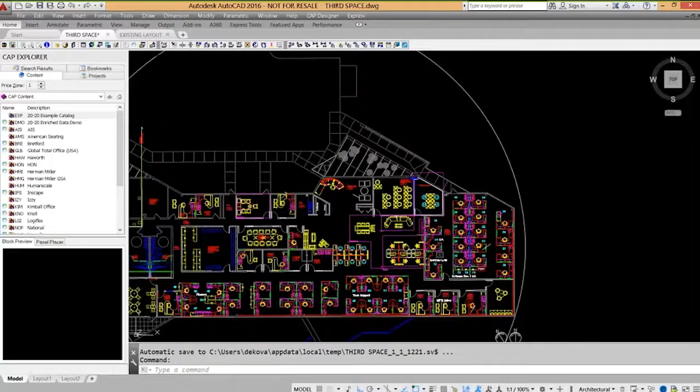So I'm going to open up - this one happens to be a CAP drawing. And there's actually a lot of different things going on in today's plan. A lot of very traditional spaces with a lot of panels. But if I come up and I look in this area here, we've got some general meeting spaces, or a little bit lower key areas that aren't necessarily defined to one department or one specific area, but maybe a little more transitional.

So I'm going to focus on this low seating area for a moment. I'll open it up in Visual Impression. This one already has a scene boundary built around it, meaning I'll be able to visualize just that one section instead of the whole entire plan. I'll give this a moment to open.

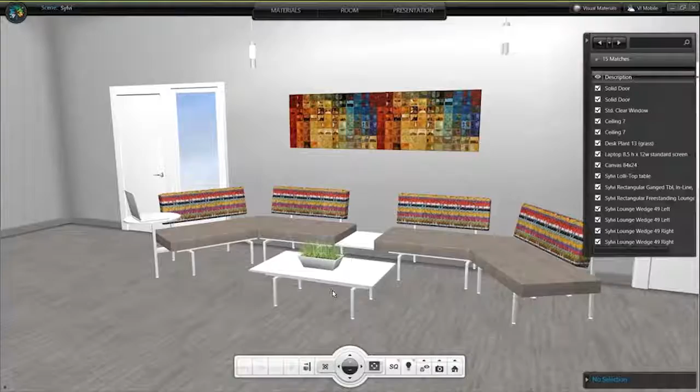I already have a few things specified, so you'll see some finishes, but I'll back up and tell you how those got there. Sometimes when rendering or working with a product line in Visual Impression, it's very quick and easy to specify and pick finishes. You essentially pick the product, go under materials, and shop for different finishes. For instance, this was showing in light green, and I can change it to dark green.

Some of your products will automatically apply or show the finish you want. But notice when I pick, for example, this freestanding lounge table, I can see my options in a list. I've got a laminate selection, I'll pick one of these styles, and I've got a few different colors. When I pick it, this catalog isn't enriched yet, so that means I have to go look for a few of the finishes, but I'll show you a couple tricks.

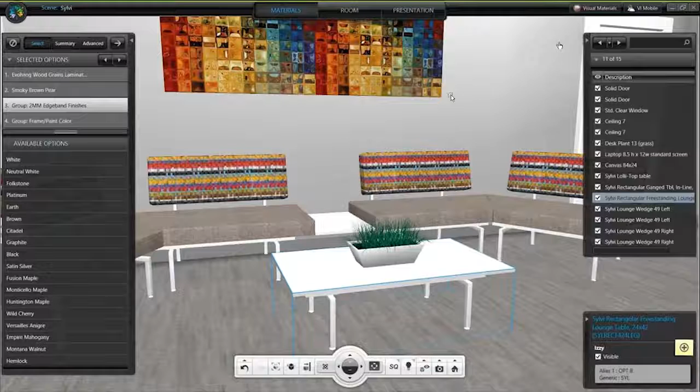Notice a moment ago I picked one of the wood grain laminates called Smoky Brown Pear, and this happens to be a Formica color. So I'm going to jump up to Visual Materials in the upper right-hand corner, and look—let me maximize this—there's a whole section in Visual Materials called Suppliers.

When you install your catalogs, you check one more box to say if you'd like to also install these supplier catalogs. If I step under the Formica catalog, I have a handful of finishes already here. Depending on how they've been loaded and organized, sometimes I can open that up further and look at different collections, or I'll cheat and search. I'll type in the word 'smoke' and notice I've got a smoky quarterstone, a smoky brown pear—the one we want—and smoky walnut.

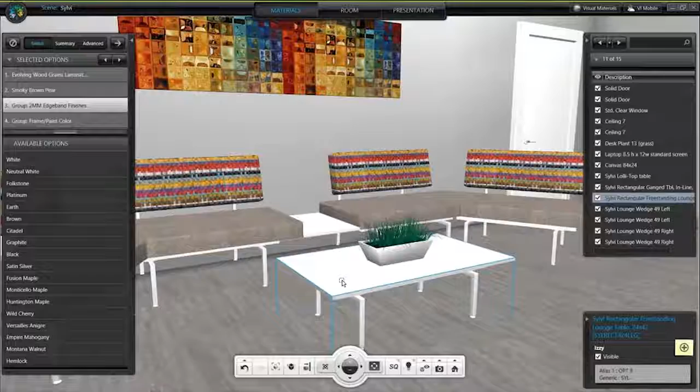Let's say I want to use that smoky brown pear right away. I can take that finish—and I'll cheat a little bit, moving this over so you can see it. Let's look at that table again, go to Advanced, and I can see the layer is this bright yellowish orange layer on that product. I'll simply take the finish I found from my supplier and drag and drop it onto that layer, so now I can see it on that furniture piece.

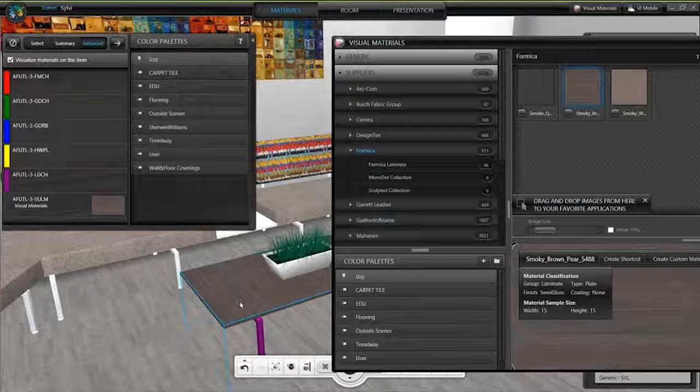So I didn't have to do too much homework—I just had to know what finish the client wanted and where I'd like to apply it. You might notice when it came in, it picked a default direction. Since this was a supplier material, we didn't necessarily know if it was going to be horizontal or vertical.

If for some reason I wanted to change that up, I can come in and create my own custom material off of this, creating a quick shortcut to it. So I'll do that real quick—I clicked on Create a Custom Material. The only thing I'm going to do different here is in the bottom right-hand corner, change the rotation a bit, let's go 90 degrees, and save myself a quick image.

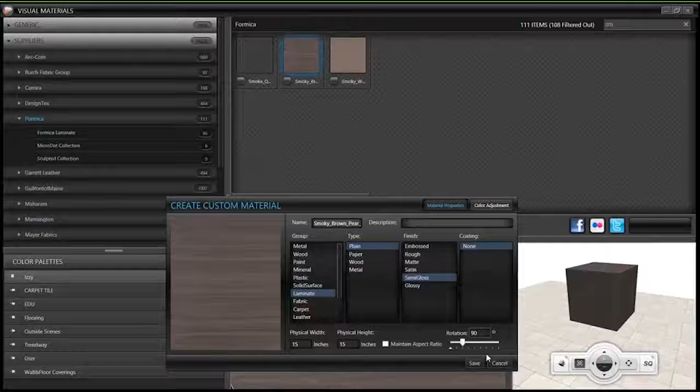Now, I happen to have a palette here already called Izzy, but to create one, you just click the little 'new' button, and I'll call this Webinar for today, and create a palette. The cool thing about saving these is they're really easy to access right when I'm inside Visual Impression. I can now drag in that smoky brown pear finish, and in my case I just changed the orientation to follow the grain of the table.

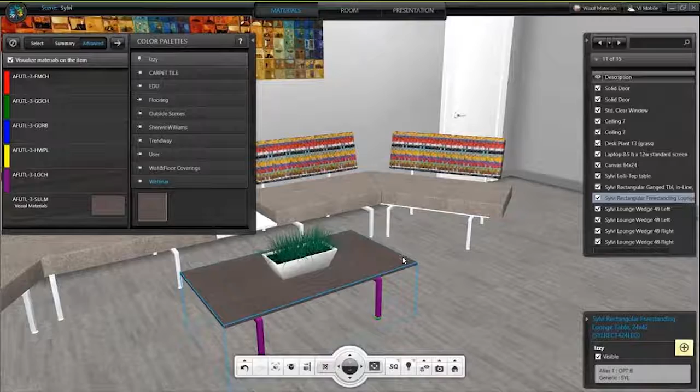All right, so that first scenario was a pretty standard finish we use all the time. But imagine sometimes you're looking through finishes too—like if I look at some of the seating, there's a really fun fabric on the back here. This one happens to be a fabric from Momentum. There are a few examples in Visual Materials under the Momentum supplier catalog, but you can imagine how hard it is to have every single finish loaded in here.

So if you go in there and you don't see the one you're looking for, you can also load your own. I jumped out to the web real quick. I'm out on Momentum Textiles website, searching for a particular finish, this one called Interium.

Many of these manufacturers and suppliers offer really great images, some in high quality. You can see all the different colorways this is available in. Maybe I want to try it in a more neutral color, this one called Draft. As long as I have access to an image, which this website does give me, I can download that really quick and see it.

So let's open that image up and see what that looks like. Here's a nice zoomed in view. Don't worry, this fabric really does have a bit of a pixelated look to it. I'm just going to copy or save this so I can reuse it. Let's save this to my desktop - it's called Interium Draft. Perfect.

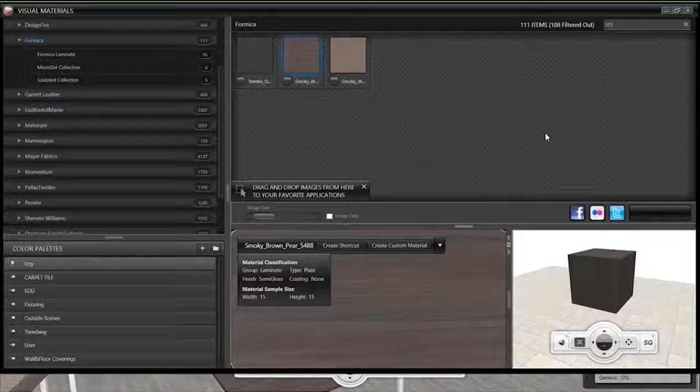Now, when I'm back in Visual Materials, I had previously created a color palette called Webinar. I can hit the plus mark next to that, and this will take me step by step into loading my own image for my own use.

Here's the Interium Draft color, I can open that up. Now when I add this, I'm going to just, for time, type something in real quick and specify a few details about it, like maybe this fabric, and I'll pick a few details about it.

Now notice it says width and height, and I still have my details like rotation. When I go back and look at that on the website, it mentions the repeat, and tells me there's a full repeat shown, about 26 or so inches.

So I'm going to actually try that out. This is something that sometimes you have to test, trial and error, to see if you get the right scale. But ideally the image we have - what was the size of that? Let me save that away.

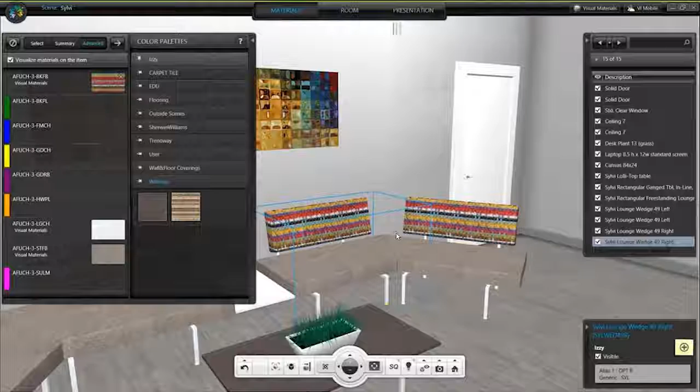Now I'll be able to take that finish and easily apply it to any layer on any of my products. I can see the layer is at the top of the list here, and let's try that in a little bit of a more neutral color. There it is. Pretty quick and easy - nice that I can bring in virtually anything.

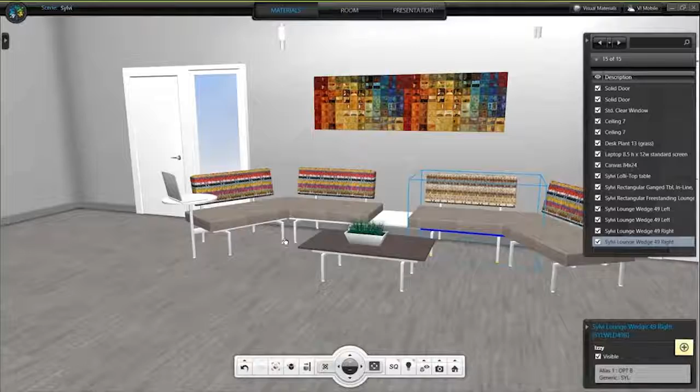I'm showing this on furniture today, but it literally can be anything. It could be flooring - this happens to be a carpet tile that I brought in. It could be wall finishes if I want to do something other than paint. It could be artwork. You're pretty much unlimited as far as this goes.

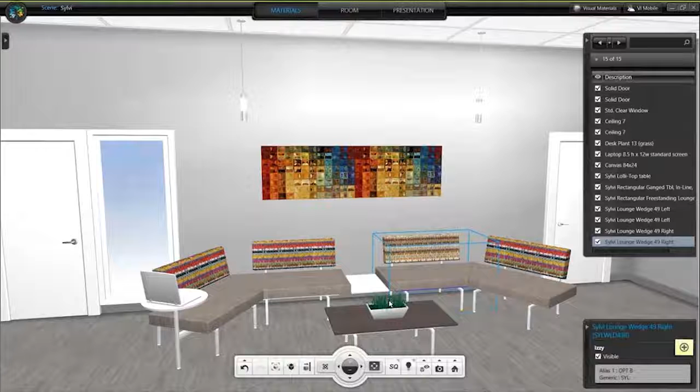So just to reiterate some of the things - talking about that third space in so many instances, and you'll see this a little bit later as the design continues, we're going to pop a lot of color and do a lot of things to really make these areas impressive. Let's take a look at the next segment.

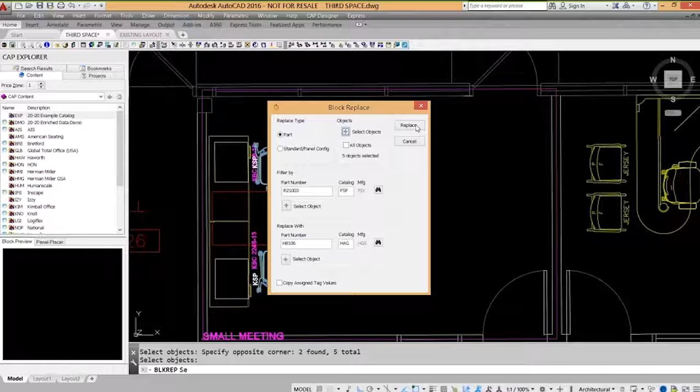Okay, just a really quick, easy way to move from one graphic to the next. Now we can do the same thing in Giza as well.

So for my Giza users, give me a second to zoom into that space. I have this very similar layout. One second as it's auto-saving right when I go to open it. Let me zoom in nice and close to that space. So same scenario - I've got the older chair and we want to switch it to a newer chair.

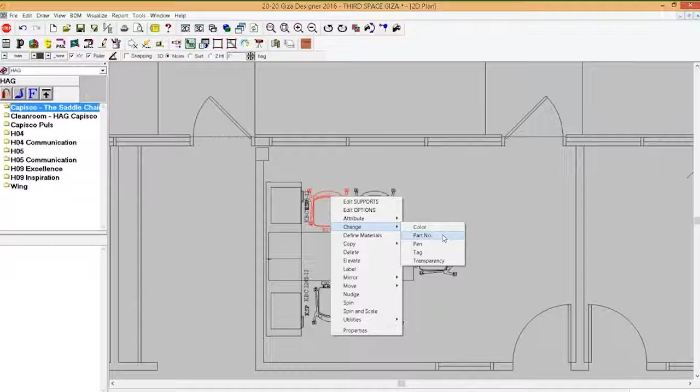There's a thousand different examples for this. Maybe you've got a traditional desk and you want to switch it to one that can be height adjustable, or you just have some different products you want to change really quickly. In Giza, you pick the item, right-click, change, and you'll notice there's change part number in the menu. When I choose change part number, I just open up this window and I can search for the product number.

Again, I'm going to switch it to that same chair. So I type in the product number and you get a little preview of it, and I can come in and choose change. Now notice that method - I happen to have just selected one chair, so it only did it to the one. I could go around and select multiple, just holding my control key down.

Or if you know you have a lot that you want to switch in an entire drawing, I can also go up to edit. I can use select, and select them by part number first, which I could quickly look through this list to find the part number that I don't want and switch it to the part number that I do want.

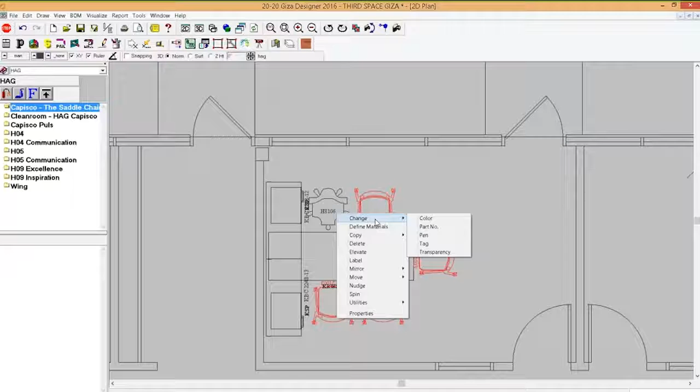So whichever method is easiest. In this case, I may only want to do it to the ones in this room, so I'll pre-select those, choose change, look for part number, and look for my product. This one was the HB106. There it is - when I changed it, now it changed all of them.

So from this point forward, if I were to send this to a worksheet, it counts the new product. If I were to look at it in visual impression, we'd see it in the new style of chair.

All right, so next couple topics. Let's take a look. All right, so now we're talking about collaboration and connection - connecting people with their devices and also with each other.

You can do this by, instead of having a printer at each person's desk along with waste and recycling, putting a few of those in separate areas scattered throughout the office. This encourages movement, which goes with health and wellness, and it can also spark new ideas through collaboration from different departments.

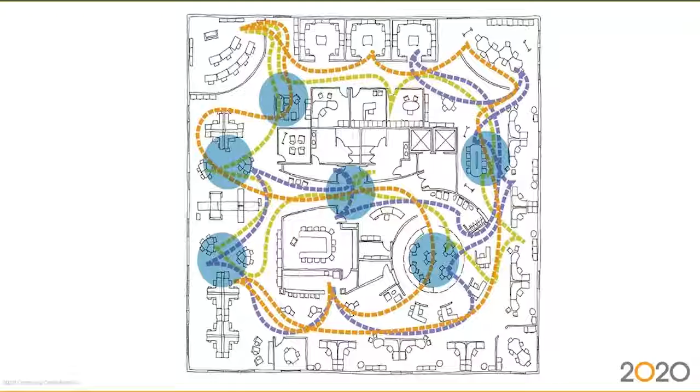This is a very different concept. Traditionally in so many of our floor plans, we've got designated areas for specific teams. What happens if you start separating them and pulling them apart, promoting more movement in that office?

Let's say we have a presentation to put together. I'm going to go back to visual impression and focus on areas where there's going to be a lot of movement, forcing a bit more collaboration—since we're often culprits of sending a Skype message before getting up to go talk to someone.

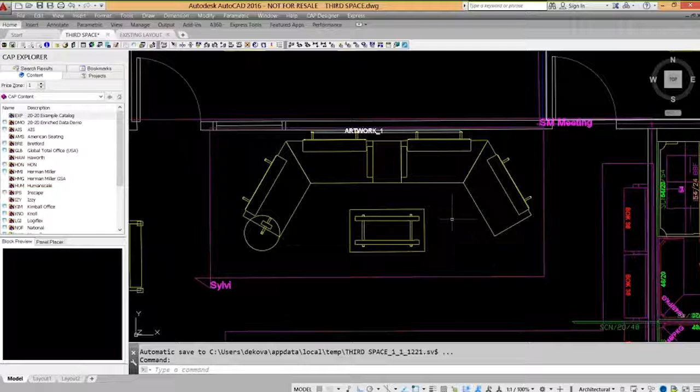Earlier in the project, when I showed the first rendering, I really only focused on one area, a small low seating space right outside a training room in this building. But there are other departments or things adjacent that I might want to show, so you'll notice a larger rendering window for this next area, where I'll show three departments or three different things going on in the space.

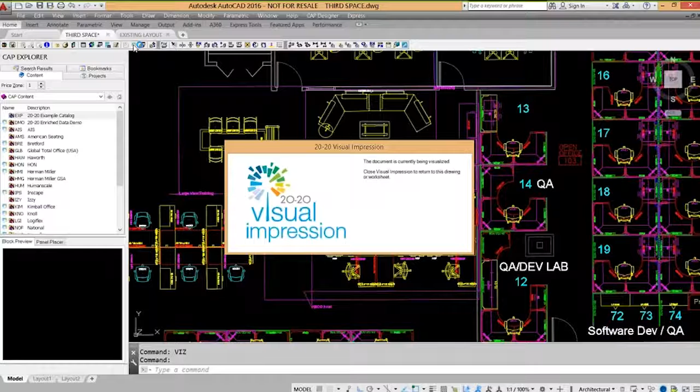So let's go back to visual impression. This time, instead of just looking at one focused area, this scene is going to show two or three different areas. Some are still in that third space category—a nice quick landing space for multiple people, something casual, right outside a traditional training room or entrance to the building.

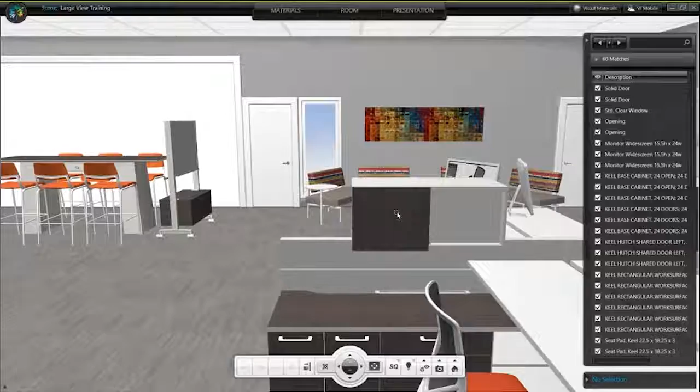Who else could work within that space? Let's take a look. As this opens up, you'll see not only our low seating area in the back, but adjacent to that is a high top table. It's got electricity and an area where we could do some informal presentations, technically open from a larger open space entranceway.

Just next door is a department, so a team is working here. How can they leverage or work through these spaces, and how can I show that off in my presentation?

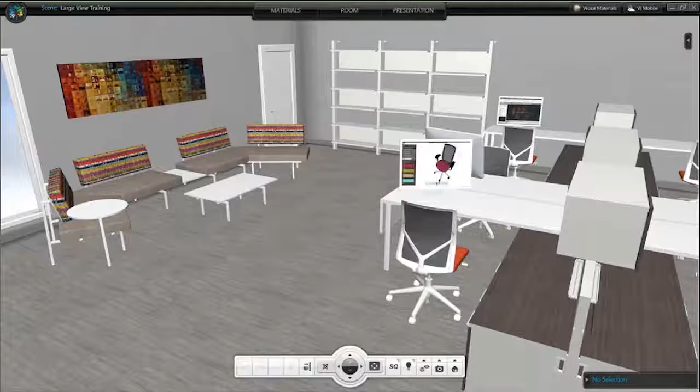Let's take a few different snapshots, looking at this a couple different ways. If I want to focus and really sell the idea of this high top table, I'll get a view I like and do this in high quality. As you can see, I've already picked a handful of the finishes—not every single one, but enough to show the overall concept in the space.

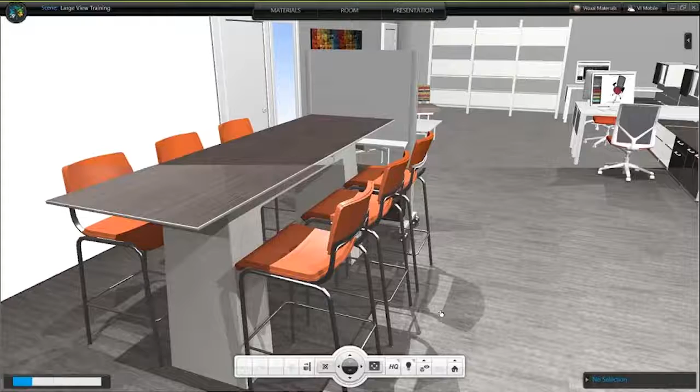Once this renders in high quality, I'll take a snapshot with the camera in the bottom right-hand corner. There are actually three different variations I might do. This one's high quality—pretty quick, intended to be very fast for presentation purposes. It's definitely not an absolute photo, but you get a good impression with the shadows and clarity of some of these finishes.

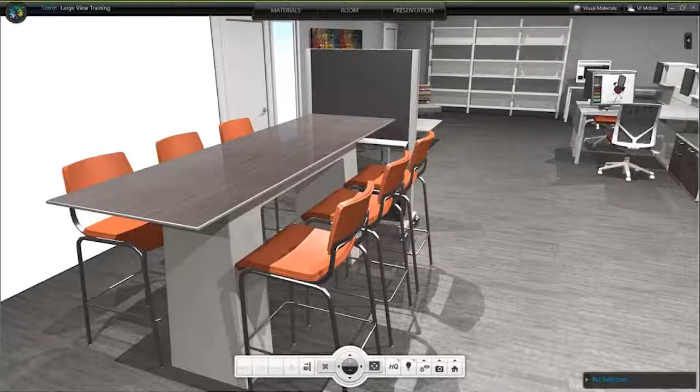Let's take a snapshot of that. I clicked the camera in the corner, and you can see it snapped that image. I could also go to High Quality Plus—for time, I'll skip that one today since it takes a bit longer, but it really softens those shadows and cleans things up.

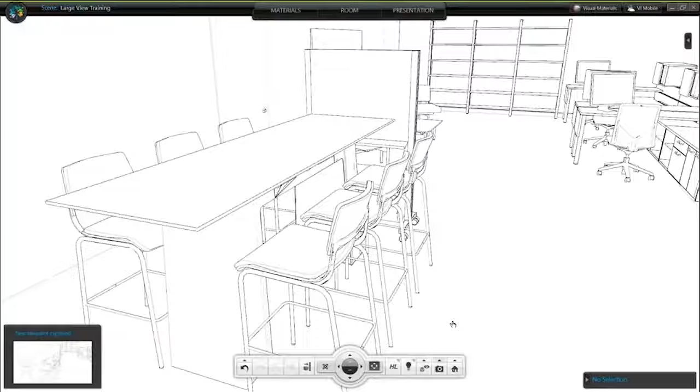But there's also Hidden Line. In some presentations, I like to start with this to take color out of the equation for a moment, or when there are a number of variations I'm going to show off within the space. So I took another image in Hidden.

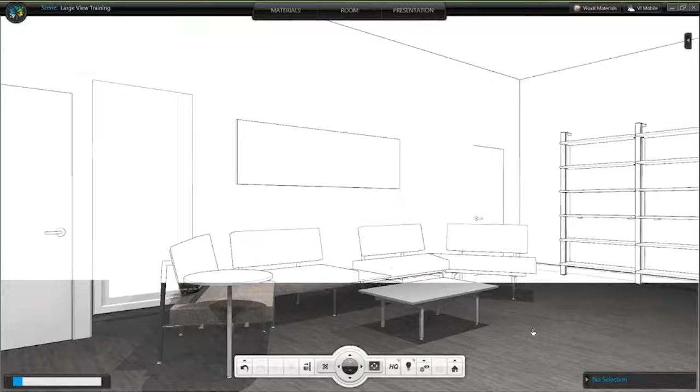Let me zoom back over to this low seating area and change the perspective just a bit. We'll zoom in, take a quick snapshot, and then change that over to high quality as well, since we'll probably want to show it in color. We'll give it a moment to finish up.

Now, there's also some lighting settings, some different things I could do to adjust this even further if needed, right in the dashboard. So we'll take a snapshot of that. And then let me just switch it back to standard quality for a second so I can move to this space. So the idea here is I want to be able to show this off, but I might do this by demonstrating it through multiple images to start.

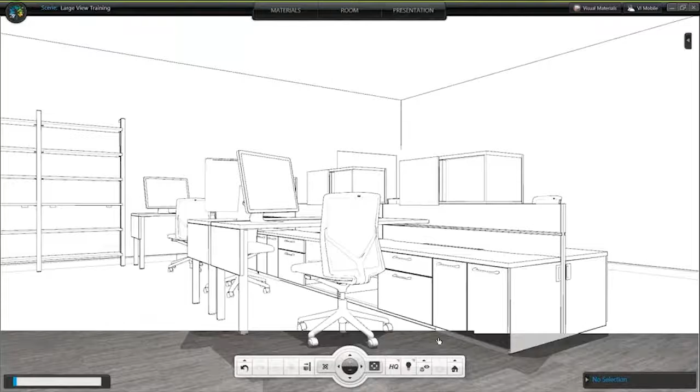And then I'll push that scenario even further in a second. Let me get a high quality image. Once this one's done, this will be the last high quality image that I will snapshot.

And then we'll talk about, well, what would you do with those snapshots? Am I putting together a real formal presentation, maybe in a PowerPoint? Am I going to email them to someone? Am I going to print them out? There's a lot of different scenarios here.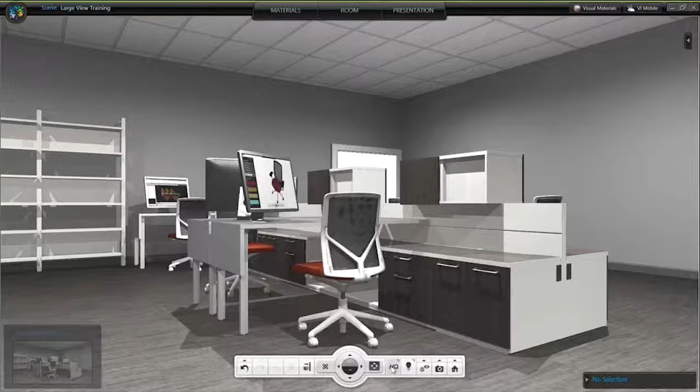So either from this screen, right where the camera is, I can look at my little film strip of all the images that I've taken. Plus there's a few from when I started the project before I finished all of my colors. Or I could go in and jump over to presentation.

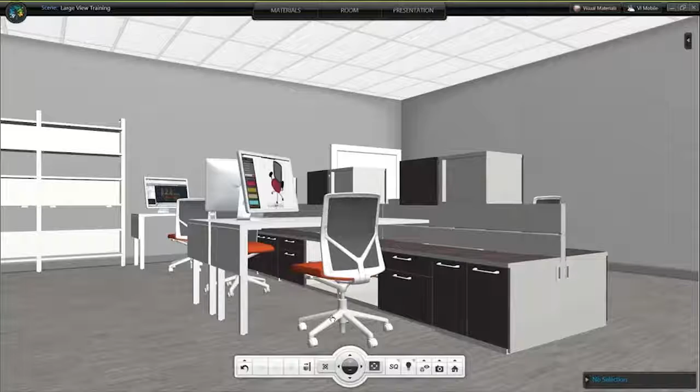You know, if you have a really complex project or one where the client is really looking for a lot of different options or different scenarios, if you remember that fabric that I switched out earlier, let's say that I run in and I go over and I pick the material that's a little bit different.

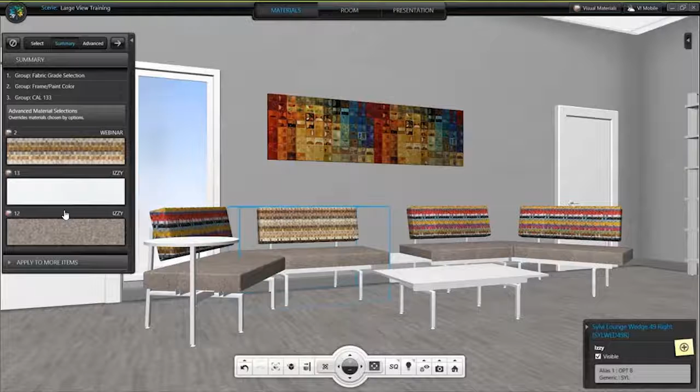Remember, we did kind of a lighter color here. And let's go ahead and apply that to all of this part number and do the same thing on here. Now, this happens to be a different color that I want to demonstrate or show as well, but I already took snapshots in the first color scenario.

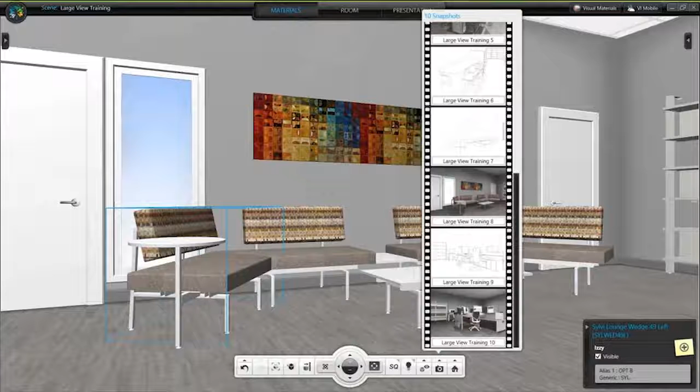So notice if I jump back to any of my snapshots, I can just click on it and it takes me right to that view. So if I want to look at this space or this space or this space, I don't have to sit there for 5 minutes and wait or try to get it just perfect.

There we go. So then I can come in and do a high quality in the more neutral color, and we'll save that away. Once this one's finished, we'll take our presentation outside of visual impression. There it is. We'll take that snapshot. Okay, I've got all of my images, and in this example, I've got color A and color B.

Let's jump over to presentation. Presentation is essentially a collection of everything you've done. Let me make my images a little bit bigger so we can see them. And you've got this whole series of pictures that we've taken throughout the process, some of them even before I selected my flooring finishes.

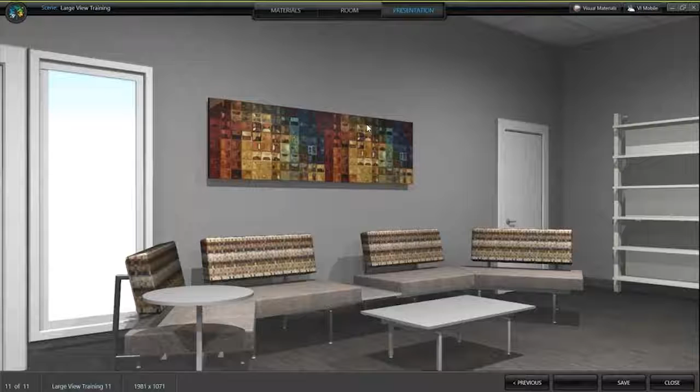But now I could take these and either preview them a little bit bigger in this view, or I could easily check the ones that I like and save them. There's a save selected at the bottom. Maybe I attach them to an email for approval. Maybe I'm going to save them just to put them in the client's folder and print them later. Where you put these is completely up to you, but reuse them in your presentation.

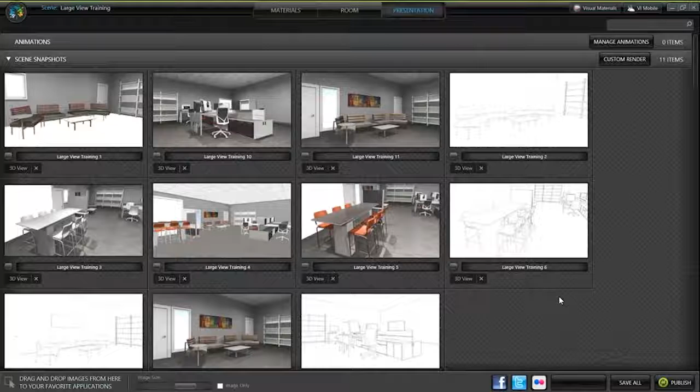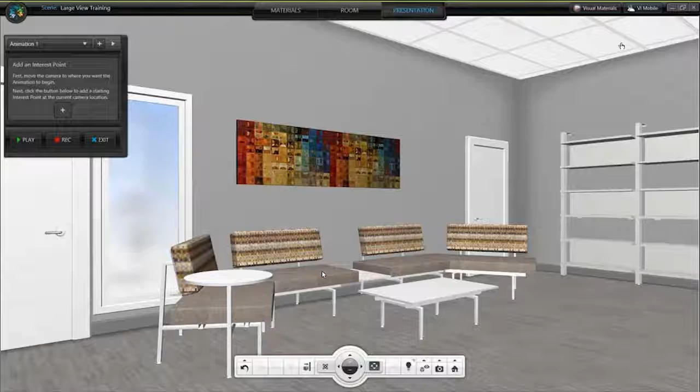Remember the whole concept that we started with, kind of talking about collaboration and connection. I want to essentially walk someone through those three spaces so they understand how they work together. So right above snapshots, there's a tool called animation, at the very top of the screen. And if I choose manage animations, this will actually bring me back into visual impression, where I can take a few different snapshots and stitch them together in a video.

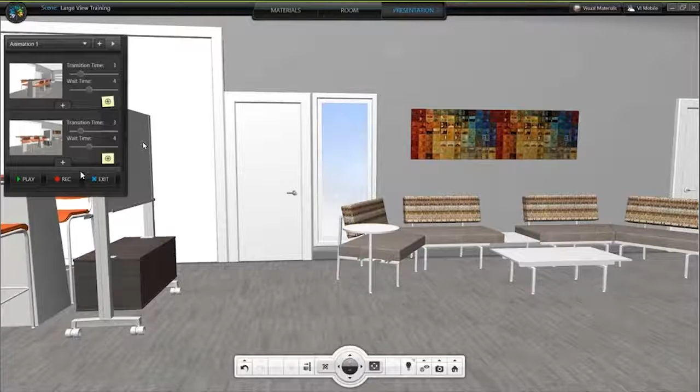So I'm just going to come in, pick a few different interest points, basically all the views or snapshots that I'd like to see. Each one of these is like me taking a few steps around the project. Let me zoom in a little bit closer here. There's a few different settings to each one of these.

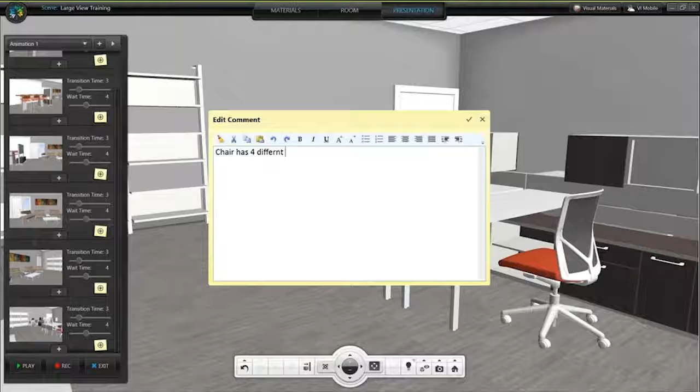You can tell it how long you want it to look at that particular spot, how long you want it to take to get to that spot, and you can even add a note about something. So over here, maybe there's a few different options for the seating color. I can click on the add comment button, that little yellow sticky note, and maybe put a note in here to say, chair has 4 different colors. Just as an example, we'll save that away.

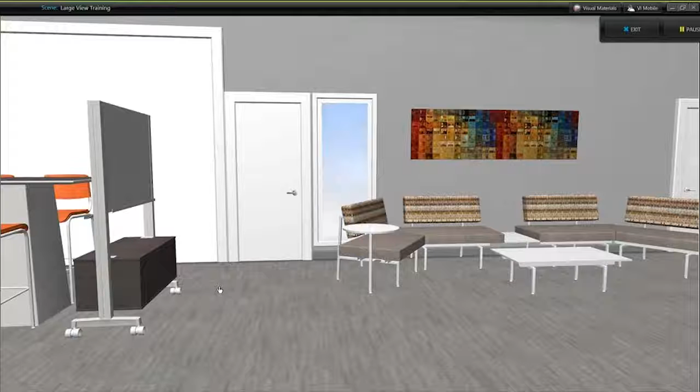So what this has done is it's taken all of these images, and now when I click play, and now I'm not touching my mouse anymore, and this could be a little jumpy over WebEx, we'll see how smooth it goes, but it's going to just move from image to image to image that I just took and essentially compile those together or have them ready to save outside of visual impression.

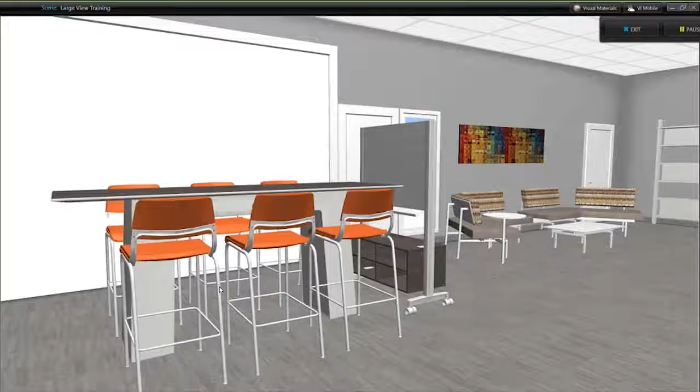So whether you're actually thinking about showing this to the end user so they understand our concept of those spaces working together, or maybe showing this to a contractor or others on this project, that would help in understanding how these spaces all flow, and especially in this case with my crazy colors, how they work together. When I'm ready to take this outside of visual impression, I would just hit the record button.

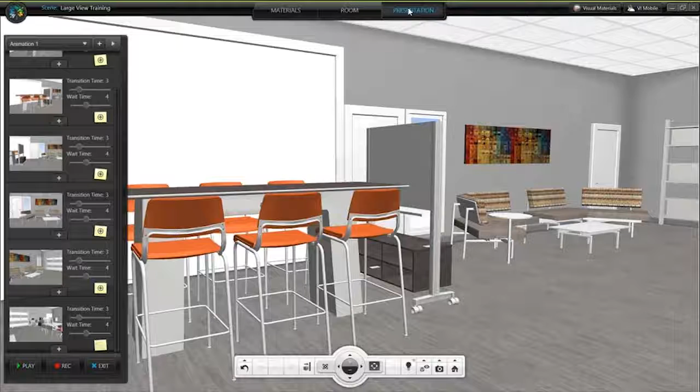It would give you options to save this in multiple formats, anything from an MP4 to an M4V. There's a lot of different styles. Right now it just saves in my presentation area that I can replay at any time.

So whether you want to use just static images, very easy to snag those and take them outside of visual impression, or you could use the animation and put them all together essentially in a video as well. All right, one more design concept we want to talk about.

Let's take a look at the next segment, health and personal wellness. All right, so lastly, but certainly one of the most important ones is health and personal wellness. Health and personal wellness is typically thought of as more of a luxury in the office than a priority.

We have all of these conveniences around us. It's fast food, takeout, people bringing donuts in on Fridays. It's just very easy to fall out of that routine.

So it's crucial as designers to address this to your clients and to help change this, because it benefits the entire office as a whole, from the coworkers, management, all the way up to the business owners. And this is because happy people are going to equate into increased productivity in the office.

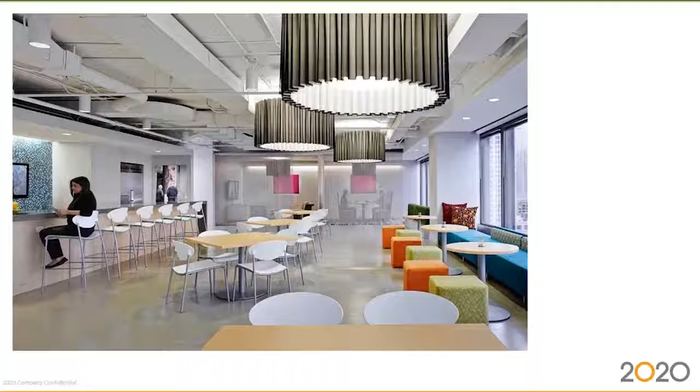All right, a few more tips that go along with this. Now, with health and wellness, and a lot of these newer examples that we're talking about, I picked out a few topics that are kind of nitty-gritty, but hopefully really helpful in large projects.

Where Sheila was talking about maybe having multiple smaller areas rather than one big area, like a break room, I have a perfect example of that in today's drawing, where I might want to focus or really look closely at some of my products and understand what part numbers I used, or I need to go back and clarify when I'm spec checking, or I might want to change some details about it.

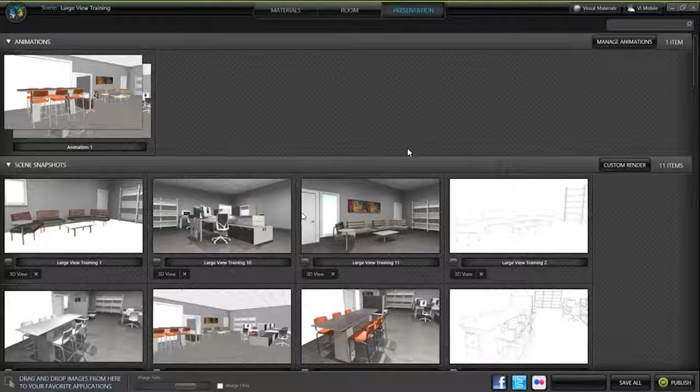That's going to help me organize it when I get ready to order. So now we're thinking not just about the design process and what that looks like, but also how do we make this work a little bit better and faster on our drawing side.

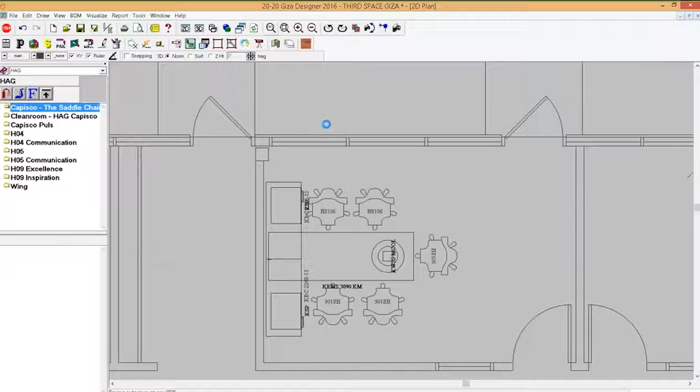Where we now need to really start thinking about how we're going to quote this, how we're going to send details over to our installer for installation work, all of those things. So two different things we'll talk about. For my Giza users, let me step back to the drawing here, and let's look at a real specific area and talk about maybe some of the tagging or the clarity of what we see on that project.

Before I send it to worksheet, I might want to change a few tags. I'm going to zoom back into one of those areas we were just working in—the section with that tall top table adjacent to my training room. In this case, this is great—I bring the products in, I can see all the part numbers. But imagine if you print this and show the client, they don't really know what this part number represents, or maybe you're working on a bid and don't want all the part numbers showing on the project.

Inside Giza, if I go up to the very top menu, underneath the draw command, I can look under the view command, under symbol text, and you can actually adjust this. Notice under symbol text there's a scaling factor I can adjust. Right now it's set to 100%. Watch what happens when I change it to 0. This is doing it to the whole entire drawing, so give it a second, but it essentially turns all those tags off. So for simplicity of printing or just making it look a little easier, I might want to adjust that symbol text as needed.

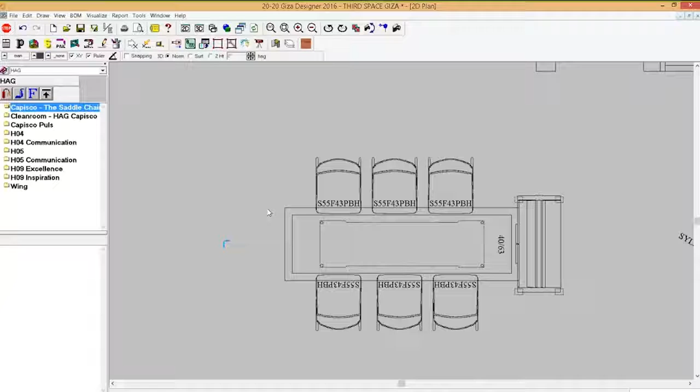I could make it a different size, even bigger than 100%. If you're printing it and having a hard time seeing it, or your installer needs that, we can adjust that. So I just changed it back to 100 for now.

The other thing I want to consider when looking around this project is, before I send it to worksheet, I have multiple areas that I might want to quote in phases or show in multiple ways so the client can understand where they're spending their money. So I might want to take a few minutes and change some of the tags.

So I selected one of my areas, like that tall top table. I'm going to right click, look under the change menu, and there is a change tag function. Under change tag, there are a few different tags in this list. The ones we see used the most are either building, floor, department, or person—very common ones.

Let's say I want to use that department field, and I just come in and call this 'tall meeting table.' What you call this is totally up to you—you don't see it on the drawing. It's just something we'll be able to sort and find those products easily when we get over to worksheet in just a few minutes.

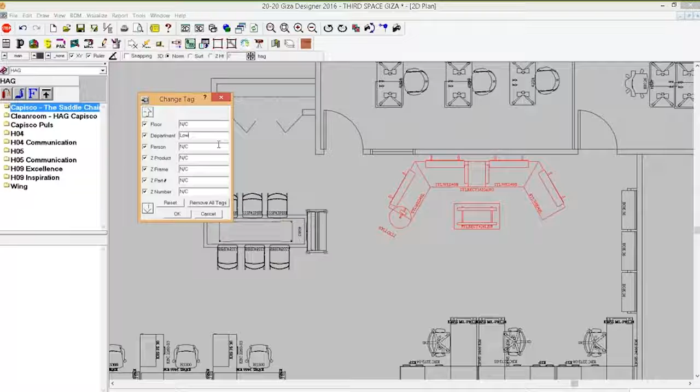So when I open up this section, I could change this department to 'low seating area.' And then finally, I'll do one more for today's scenario—maybe this department right here is a team, so I'll change that tag and say this is my sales team. When I send this over to worksheet, I'll be able to open up the department column and easily find those products.

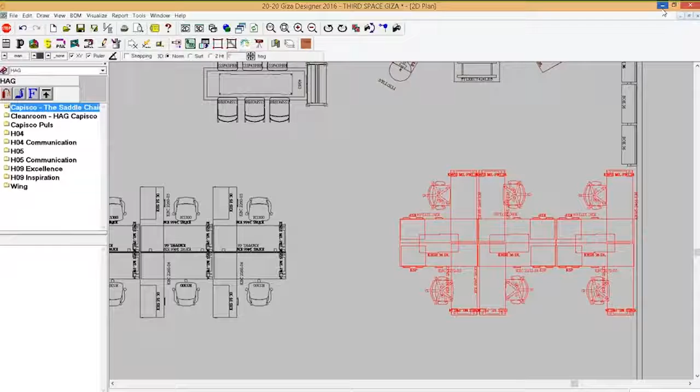In a similar way, for my CAP users, we can do a lot of the same things. I'll actually show that first tool a little bit different though. You might notice some of your products do have tags, and some of that could be controlled with the layer on, layer off to adjust those. But notice this group over here—when I brought them in, it actually did not show a tag.

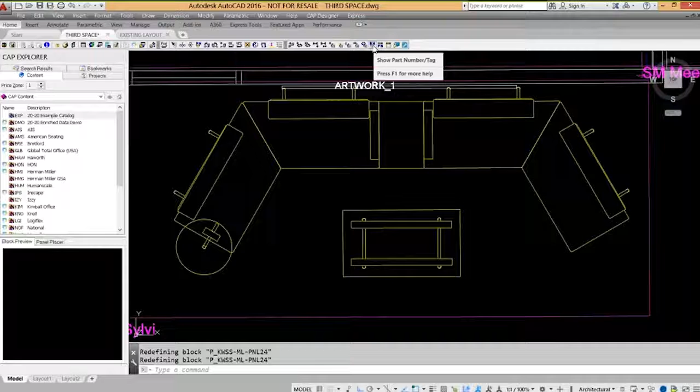But there is a tool inside CAP called toggle part number tag—show part number tag. It's a toggle button you can go back and forth. Right now it doesn't have any detail in that tag field, so you see the product but not any text. But if I click the show part number tag button and select my products, it will turn those part numbers on. This is going to be a little different on each line, depending on what they do or how they show their tags. Sometimes you just want to switch tags and part numbers back and forth depending on how you want to print it. I would use that to help spec check.

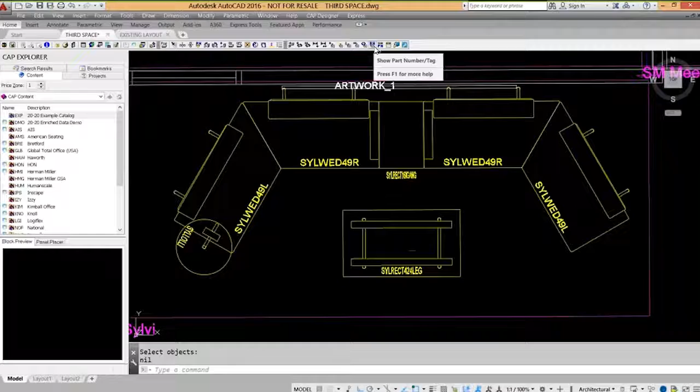That was the show part number tag—it kind of looks like a little PN with a part number or tag icon on it. Then, just like I did in Giza, I'd want to go around and tag or assign the different values so I can sort this in worksheet. The tool in CAP looks like a white piece of paper. I'll use the assign command, and you'll notice I can come in—much like Giza, we have those same four fields: building, floor, department, and person.

I also have alias 1, 2, and 3, so you can use any of these, but let me use department for consistency with what I did earlier. So I'll say tall meeting space, select my objects, group them first, and assign. Then I can go right back into that same tool and repeat this for each unique group.

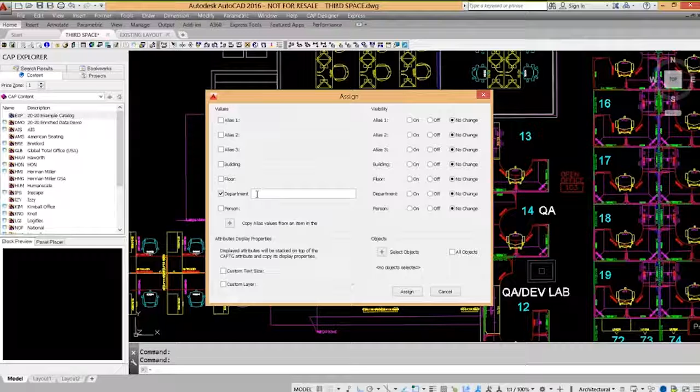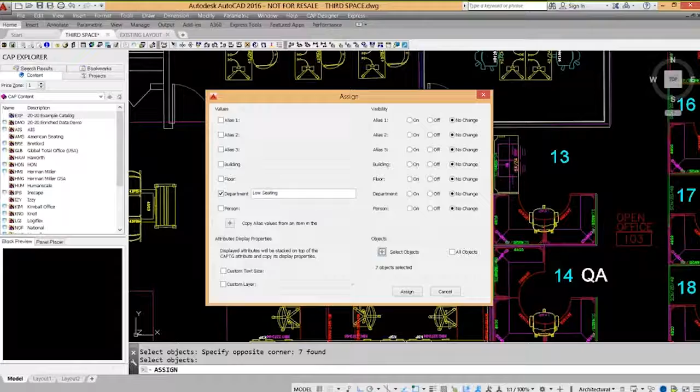What did I have? A sales team—I'll select this area over here. In the end, I'll send this over to worksheet in just a second and we'll see all of this sorted out. So let's take one more area—this was my low seating—and we'll select our objects and grab all of those. Now I don't believe every single part has an assignment in here, but a lot of them do.

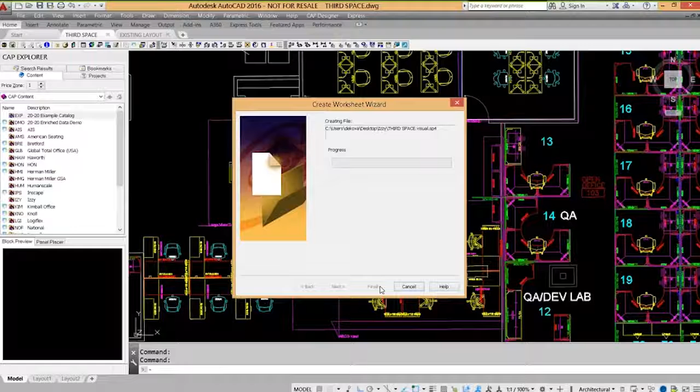So let me take that, save it, and send it to worksheet. I can look for the worksheet tool—inside CAP it's this little spreadsheet, and in Giza there's a green W that I can send it over to worksheet, and we'll go ahead and count everything. Give this a minute. Worksheet is basically going to populate our list of all our products in this drawing.

When I open this up in the worksheet file, I'll be able to look for the department column and sort out my project to understand where all those products came from. Notice when I first opened my example, I don't have all my columns on, just a handful that come with the basic template. So I'll right-click on any header, look under columns, look under tagging, and here's department. This is just one way to turn that on since I had one quick one.

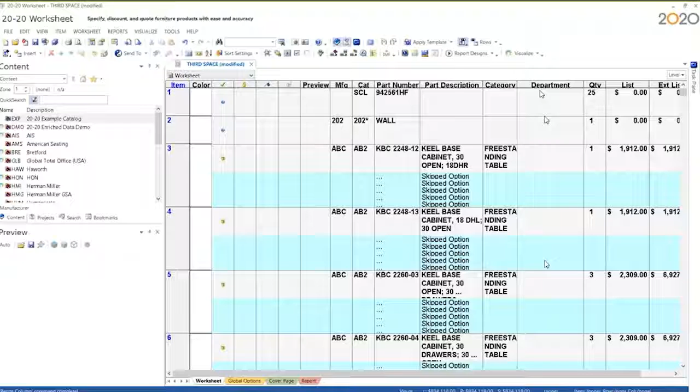You'll notice I have a few things that don't have department assigned—just for time, I only did a few. So let me sort by that column. I can click on it once to sort all the things that are not tagged, then click on it again to sort all the things that do have a tag. So here are all my items from that tall meeting space, my sales team, and my low seating area.

There's a lot of finishes I have not selected yet. Some already have green check marks—I can see some things are complete, but now I can see what I've got left to do. Sometimes when I'm sorting a project really quickly and trying to understand, okay, how much are we spending in the sales team, how much in that low seating area—there's a lot of different combinations or ways I might want to sort this.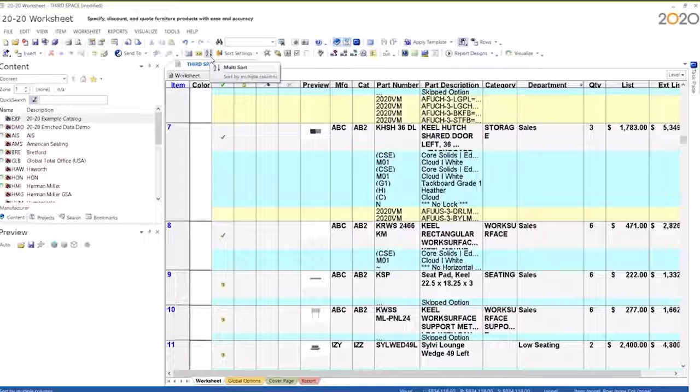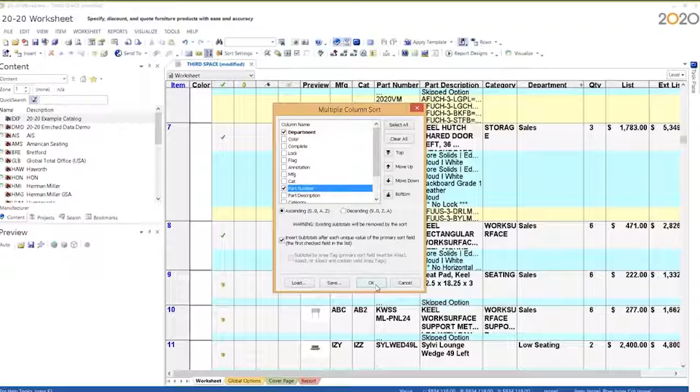So I might actually use the multi-sort command. Rather than just sorting by one column by clicking on that header, I could sort by multiple—maybe department, and then part number. Notice if I put department first, it's checked bold, meaning when it's first in the list I can also put a subtotal in there. So I'll say OK, and all of my items that have a department tag now have a subtotal telling me how much they are.

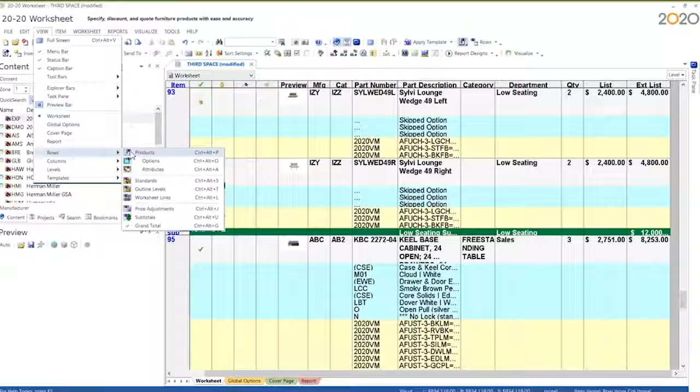I'm going to do one last thing—again, thinking big projects, I want to keep it sorted, simple, and easy. I'm going to go under the view menu, under rows, and turn my products off. This sounds kind of crazy, but this was what I was going for: I wanted to see all the items I don't have tagged.

That was a lot. My low seating area, about $12,000 list. My sales, $31,000, and my tall meeting space was $13,000. So what I did with that tool is just tell Worksheet to turn the product lines off for a moment—maybe I'm not working on finishes or counts at the moment, I just want a quick overview, high-level view. When I want that back on, I go back up to View, Rows, and Products.